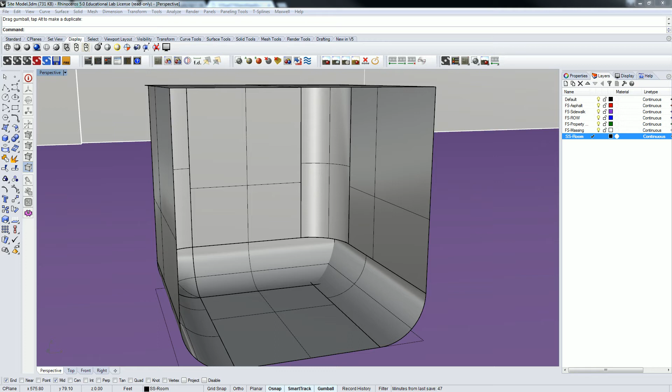All right, so these corners, they're a little funky. When you start doing rounds and fillets and all this stuff on Rhino surfaces, they get really crazy sometimes because you need to think about it procedurally. And before this was done, before I yanked these things over, what you actually got were surfaces that weren't really connecting, and it's really difficult for Rhino to compute that.

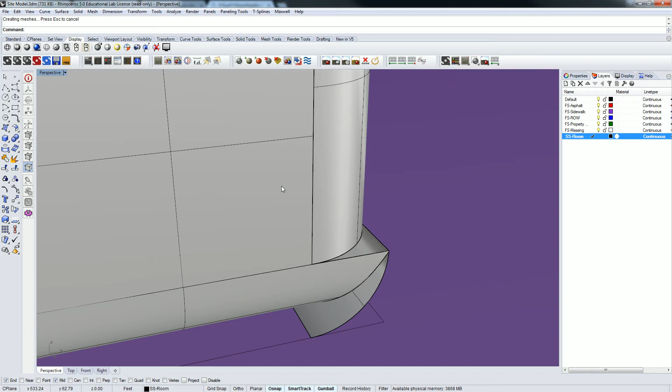So what I like to do as a best practice, and it's really because I'm not the world's best expert in Rhino, so there are probably faster ways of doing it, but I just have a habit of trying to simplify the geometry into something that I can recreate a little bit more simply. So I try to stick with sweeps and revolves and stuff like that that's going to help me simplify this new connection I have to make.

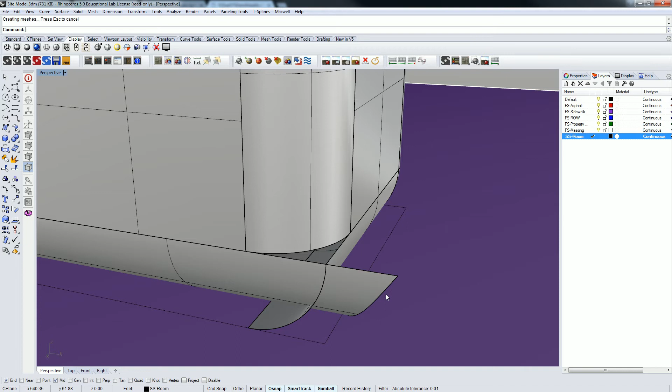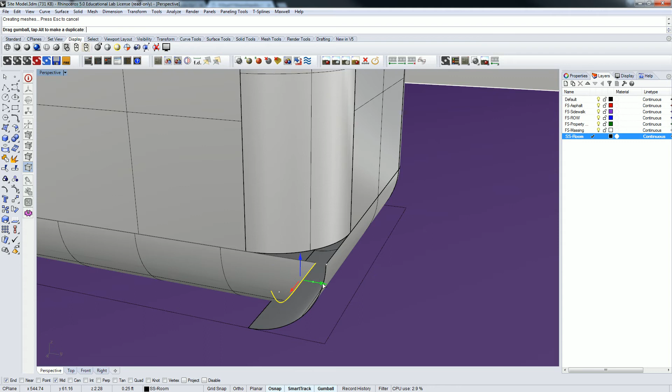Okay, so in case you missed that, Control and Shift is how you use a hotkey to select an edge of a surface, right? And that allows you to use the gumball to do the Move Edge command. You guys remember that? I think we talked about it one of the first days. So I can slide this back and forth just like I'm moving the edge. It used to be back here, and I moved it out here just to make sure that they both cross one another. It wasn't really all that critical in the end, but the real key is grabbing this edge, and it doesn't matter which edge it is really.

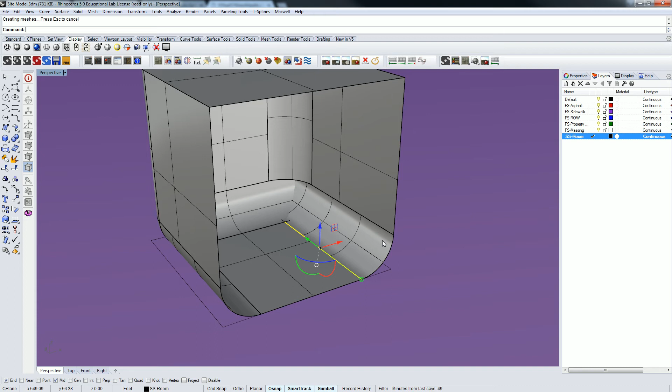But if you want to create an extrusion off of an edge, it's Alt-Shift. So Control-Shift to grab the edge, and Alt-Shift to create an extrusion. But the actual command is a little funny. You have to sort of hit Alt, click on the arrow, and then hit Shift. Oh no, sorry, hang on. Was it Alt? Now I'm forgetting. Hang on a moment. I just did it by nature, but Control, Alt-Control. There it is.

Sorry. Yeah. The fillet radius, did you have it? You left it at 1, or did you change it? 2 feet. 2 feet. Yeah.

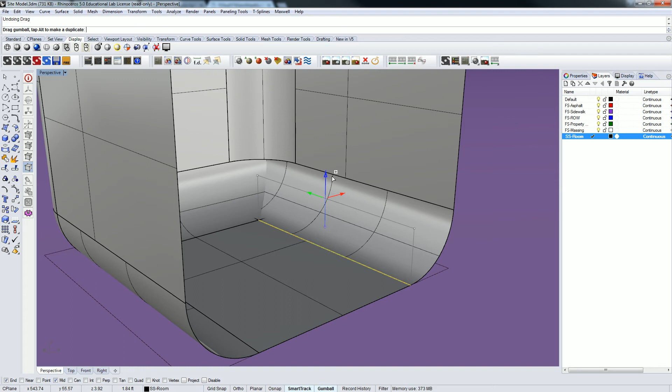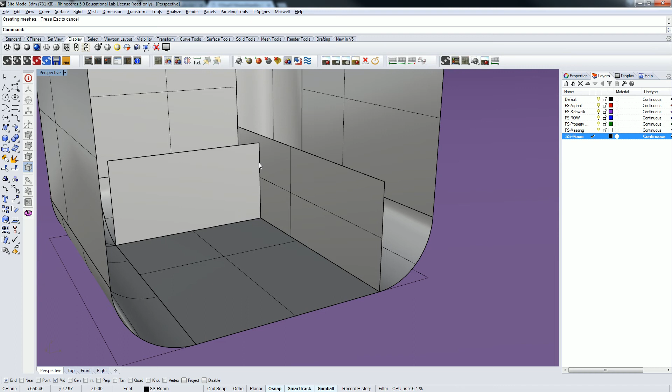Anyway, so I just did it second nature. I thought it was Alt-Shift. It's not. It's Alt, click, Control, and that's gonna create an extrusion. Then I grabbed this one real quick, and I just pulled it over. That one wasn't creating another extrusion, it was just pulling it over. I did the same thing here with this surface. I did Alt, Control, pull it up, then Control Shift to grab that edge, and then you can yank it over.

What that does is it creates these two little surfaces that I can use to trim that little edge condition out. So I do Trim, I select these as my cutting objects, and then I select both sides of that corner to be cut. Am I losing any of you? Yeah. Where did I lose you? At the hotkeys.

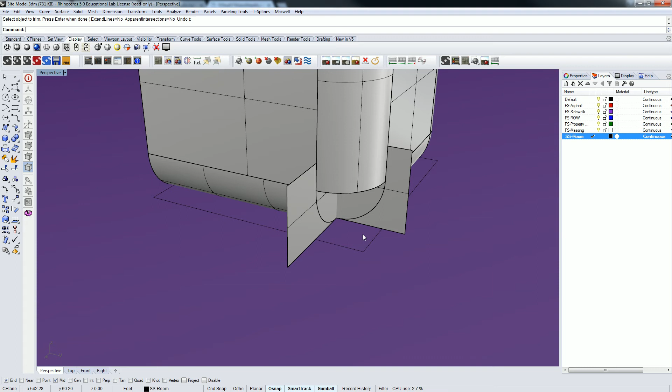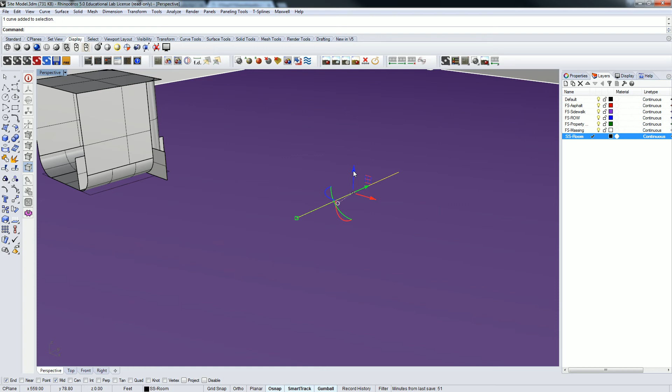Yeah, let's do some practice, right? Let's do a line. Hopefully one we can see. So the line, you can just click it to select it. But if it's a surface, let me just make a surface real quick. So if it's a surface, you can select the surface by clicking on it, but you can't select just the edge. You have to do Control Shift and grab the edge.

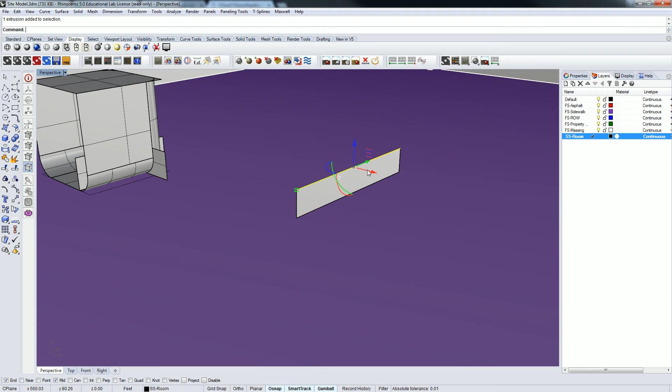Usually the gumball will align to object. There are some different gumball settings that you need to be aware of. Usually it'll align to the object, and you can kind of yank it and basically stretch the thing.

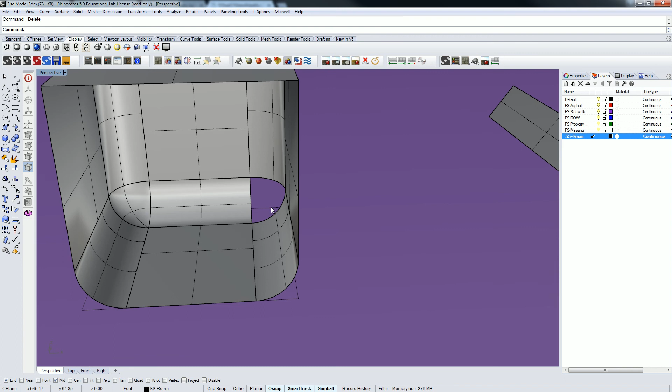Kevin? I have an easier way. What'd you do? You can go back to a cube, and you can just use FilletEdge. Go to 2 feet and select all the edges you want. Was it still joined? Yeah. Okay, you did it when it was still joined. That's good, actually. Thank you. So I guess we could do it that way, right? You still had all the surfaces joined? You guys want me to show you that way? It's probably faster.

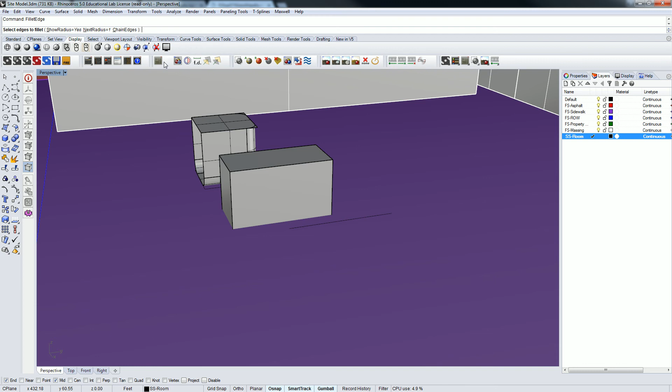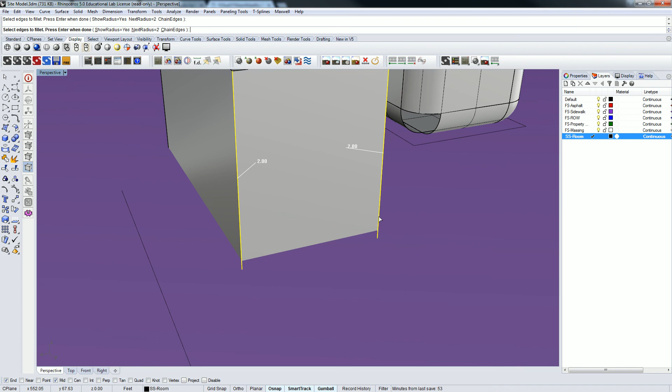FilletEdge. What's that? Working all the walls? You really only need to do the bottom ones. FilletEdge, next radius 2. Yeah. Cool. That's clever.

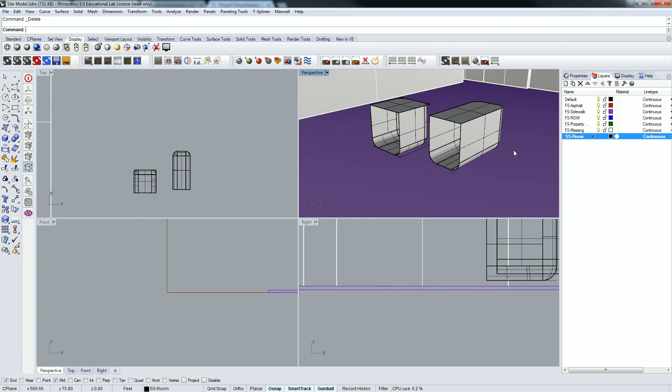Learn something new every day. I like that. Oh yeah, okay, so I was thinking in the laboratory we did that, and I was like, I feel like there's an easier way. Yeah, I thought so too. I was like, what is it? Thank you. It's been a long time since I've done that.

But anyway, in case you guys missed it on the revolve, if you get yourself into a pickle and it's not working, for the Revolve command you just Control Shift and click the edge, and you just need to make sure that you set the center line axis going vertical. So I just did Revolve, clicked here on the bottom point, and then I just held Shift and went in the vertical axis. Whoops, that didn't go in the vertical axis. In the vertical axis? Hey, nice.

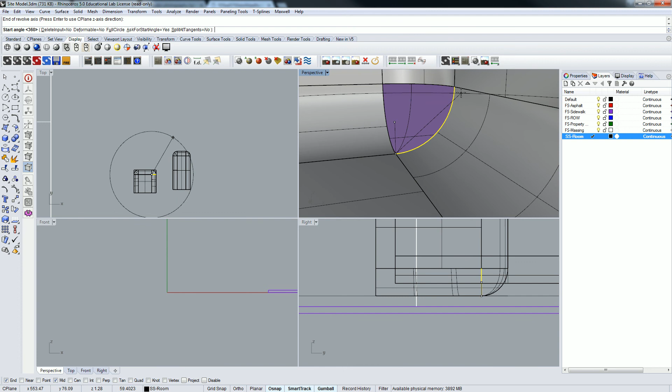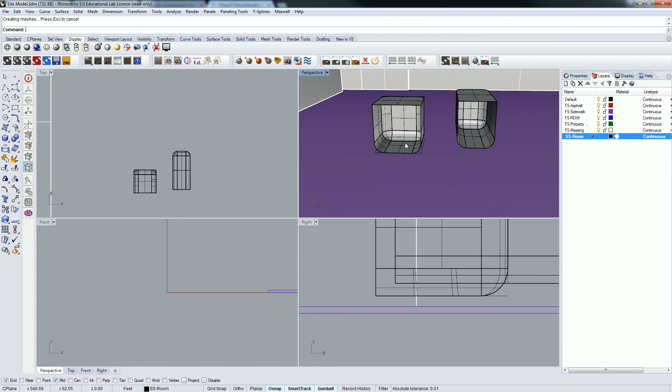Alright, so anyway, let's get going with actually setting up the interior environment, but I'm going to close out this video because it was sort of a separate thing.